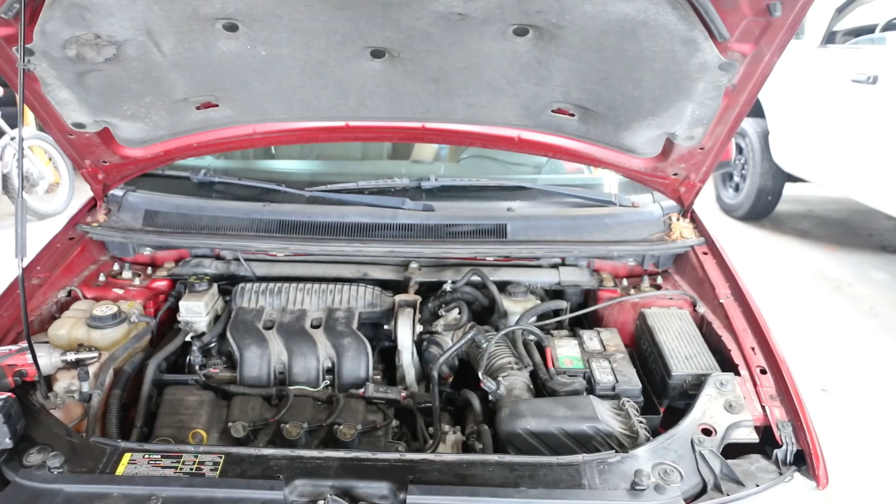Tammy, can you start it up for us? As you'll notice, when it's cold, the vehicle's been sitting for a little bit, the misfire isn't so bad. As it warms up, you'll start getting that fish bite. Sometimes it'll get worse, sometimes it'll get better. But when you put it in gear under a load, it really stands out.

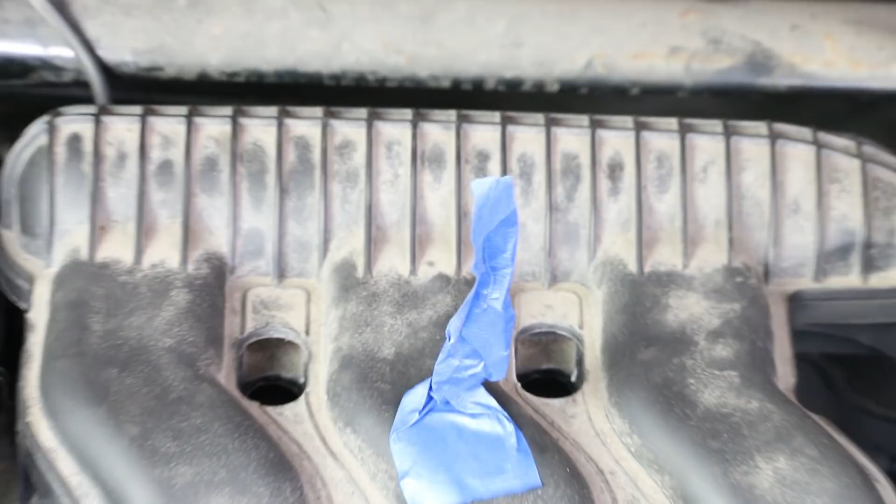Put it in drive. Step on the gas a little bit, power braking. Just a little more. A little more. Alright, that's good. A little more.

I'm hoping you guys were able to pick up on that misfire and how it got worse once we put it under the load. This scan tool has some things that we could use under the powertrain to help further our diagnostics. In addition, if you have some mode 6 data that you have access to in a generic OBD, you can go in there and look at your misfire counters as well. I have this, so I'm going to demonstrate it, but if you don't have this, the next step that I'm going to show you using an oscilloscope to determine what cylinder is what can also help guide you.

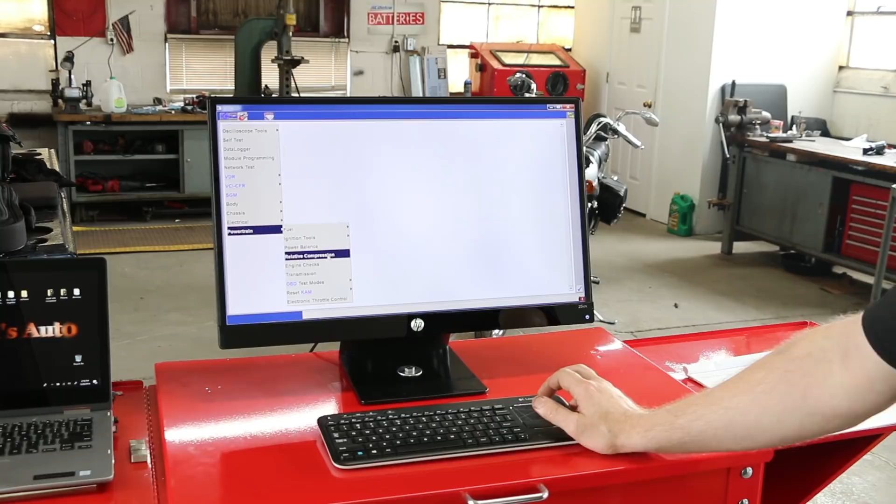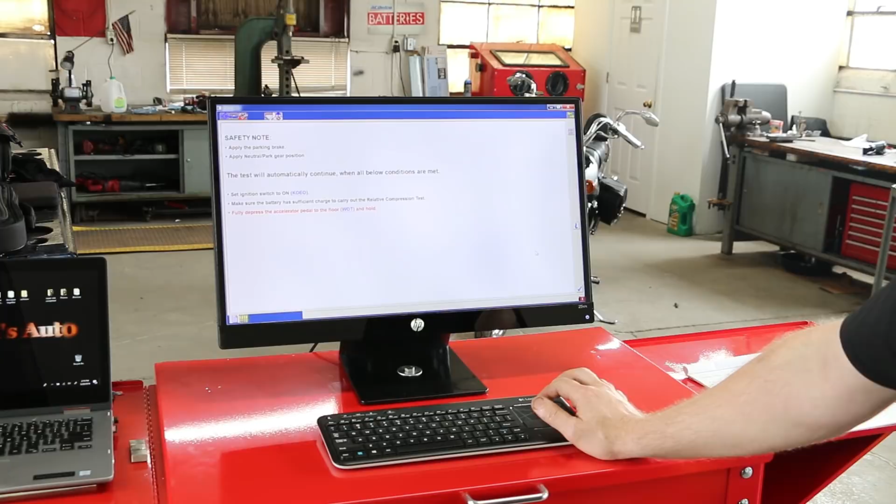We could do a power balance, we could do a relative compression check, we could determine if it's mechanical or not. So let's see, you have the key on, Tammy? Yeah. Turn the key on, please. Let's do a relative compression check. This one we had charging prior to starting up the camera. Next we're going to fully depress the accelerator pedal to the floor, wide open throttle, and hold. Push the pedal to the floor, Tammy. Now I need you to crank it. I'll tell you when to stop. Good.

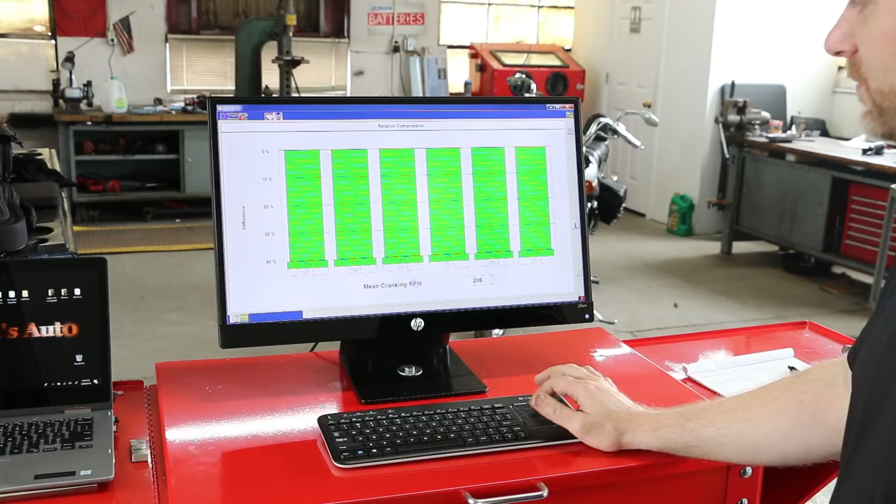You can do the same thing using current with the amp clamp with the oscilloscope, and we can demonstrate that sometime if you would like to see that. So it passed the relative compression check. So it's saying that mechanically the vehicle seems like everything is contributing, and we have 0% loss on any cylinders. Okay, so we could go in now.

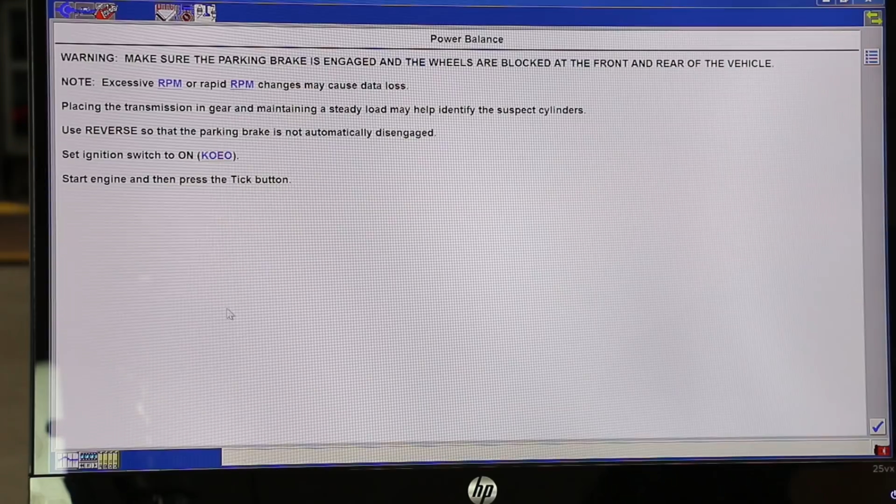And what I'd like to do next is a power balance test. Pretty much this is a misfire counter. Ford puts it out in a graph form and it'll show you what cylinder has the misfire. Placing transmission in gear and maintaining steady load may help identify a misfire. That's what we were doing before when I was trying to demonstrate it for you. Start it up.

So right there, you can see the cylinder that's dropping out is cylinder number 4. The rest of the cylinders look okay. We don't even have to place it in drive. You can do it to see if it gets a little worse, but it's almost a dead miss at this point. Want to put it in drive, Tammy?

Oh yeah, it just gets worse. So it's pretty obvious that it's doing a good job because we know that we moved everything to cylinder number 4. However, when this came in, it was showing cylinder number 1, and I didn't place it there. It came in this way, and I didn't know if I could trust the scan data. 90% of the time it could be 100% accurate, but there's always that small percentage when it could be wrong.

And for you to be misled on a job this in depth, of pulling the intake and stuff off, can really ruin your day, to say the least. Put it in park, Tammy. Shut it off.

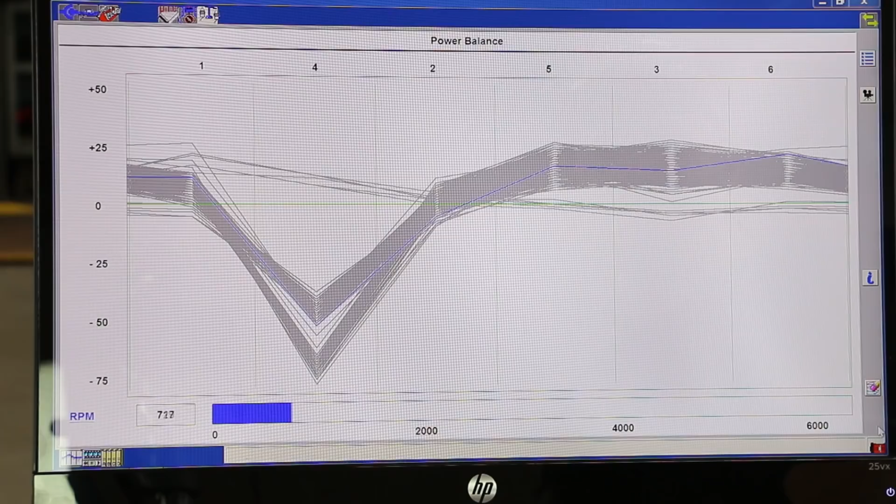Okay, so this is pretty obvious that our misfire has now moved to cylinder number 4. It's what you've seen from the process data. And remember, if you have mode 6, you can go in there, look at your misfire counts, and try to determine a route to go from there. But this one isn't so easy.

Well, cylinder 4 is nice and easy to get to, but when it came in, it was cylinder number 1 underneath the intake manifold. So I really couldn't get back there without taking the intake manifold off. So I wanted to be 100% certain that I was going in the right direction. It had the classic symptom of ignition misfire. Ran fine, put it under load, and it started getting that fish bite.

So my gut was telling me it was ignition, but I wanted to be certain that I was going after the right cylinder, and I wanted to verify that with an alternative method. So what I'd like to do next is pull out an oscilloscope. You guys have seen me use the T-Book Mini in the past, and I'm going to be using the same one again today. Some of you guys have mentioned seeing this Hantek in the background.

Maybe one day I'll demonstrate it. It's not my favorite scope. It does the trick. It has its place. But I would love to get a Pico scope. So if you're watching, Pico, someone. But the T-Book Mini has been holding me off until the day comes that I do invest in the Pico scope, which I am saving for. It's on my wish list, and hopefully one day we can make that happen.

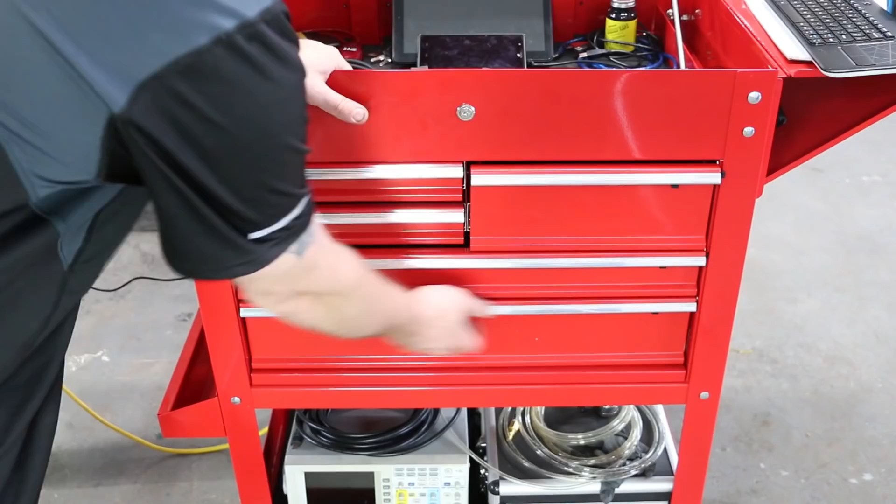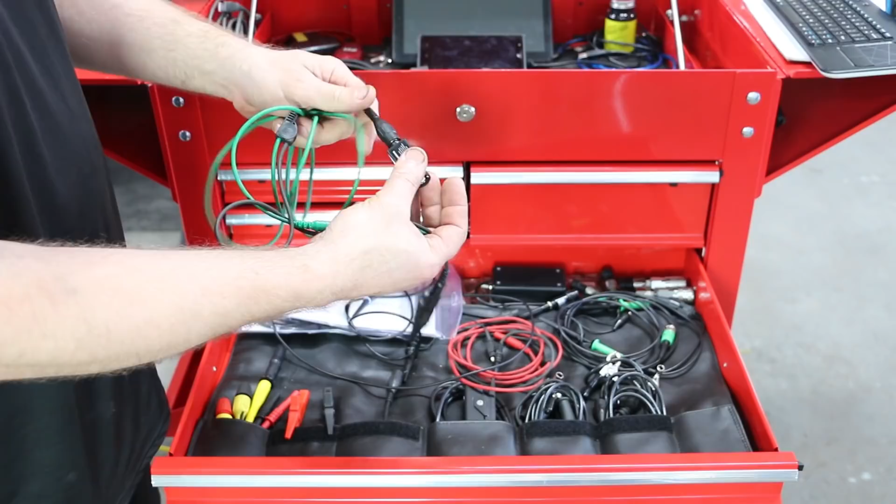So I'm going to demonstrate the tBook Mini once again. I want to demonstrate this because this is a fuse buddy, and this is my first approach. I want to get to something easy, so I'll demonstrate that as we go. We're going to need a 20-to-1 attenuator. Look at that, still set up from when I used it last. I got to clean this stuff up. But this is going to be for the primary voltage. And we'll need a low amp clamp.

In order to use the oscilloscope, we got to know where to hook it up, right? So I actually have some schematics pulled up. Let me drag them over here for you. And where I got the schematics for today's video was from BBB Industries. This is a very helpful resource. You can look up some TSBs, wiring diagrams, and I was turned on to this website through Ivan from Pine Hollow Auto Diagnostics. He mentioned it in a few of his videos, and that's where I learned about this.

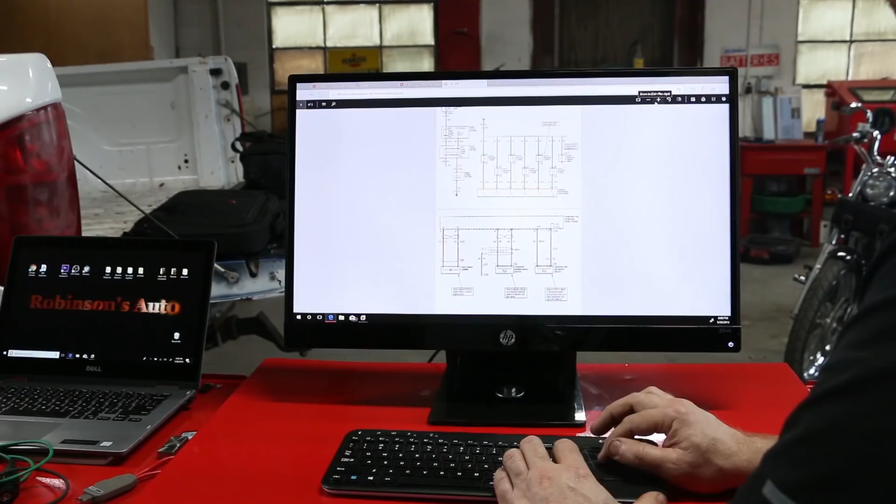So as you can see, 2005 Ford Freestyle. Went to engine, went to subsystems, and I went to ignition. It gave me one schematic, and I actually saved this schematic to the desktop. We'll get a closer view. We'll zoom in a little bit. I'm hoping this is showing up on the video okay. But this is the first initial schematic that we brought up.

And if you follow everything down, you'll see we have the ignition coils, 1, 2, 3, 4, 5, and 6. Everything's showing here, in addition to an ignition transformer capacitor. It says it's there to minimize radio interference caused by ignition coils. Okay, so that might add a little bit of something or another to the circuit, not certain.

So what I thought was, oh wow, everything looks like it's just on the ignition coils. We should get a nice clean signal from fuse F1.41, 15 amp, located in the battery junction box, BJB. Okay, we know that because of 361 RD. If you look down here, 361 RD, pretty much sit that on top if there was enough room, and that would be your flow.

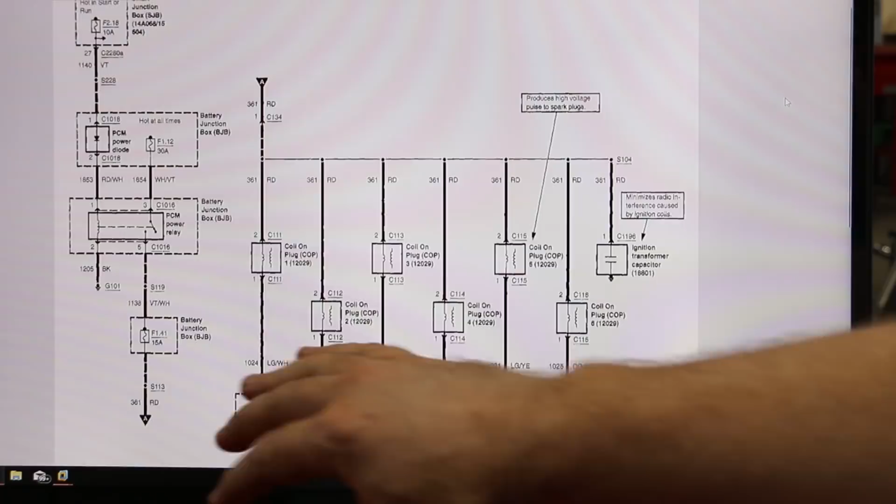But yeah, you would think that fuse 41 from the schematic is the only thing feeding this circuit, or this is the only thing on that circuit. But you'll see otherwise once we go to the fuse box, and I'll show you what I found. The junction box nearest the battery. Then I located fuse 41, 15 amp, which is right here. And I put it into my fuse buddy. Okay, now we've made a nice little circuit, pretty much doing the same thing, but we put this little loop here. Okay.

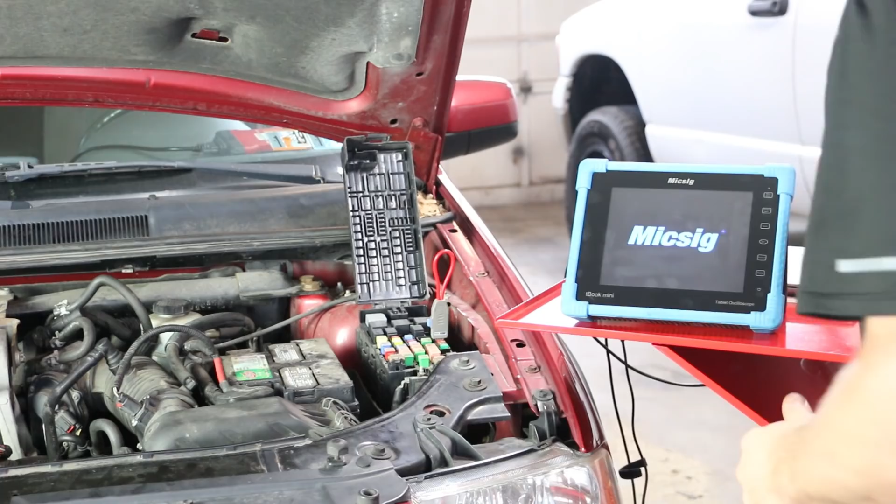So now that we had a place to put our amp clamp, we moved it a little closer and we started preparing ourselves. Now this oscilloscope isn't going to have any presets on it, and it's kind of one of the things I like about it because it forces you to learn how to use it. And once you put them in there, you can save your own presets. But it is what it is. I make the best of it because it's what I got.

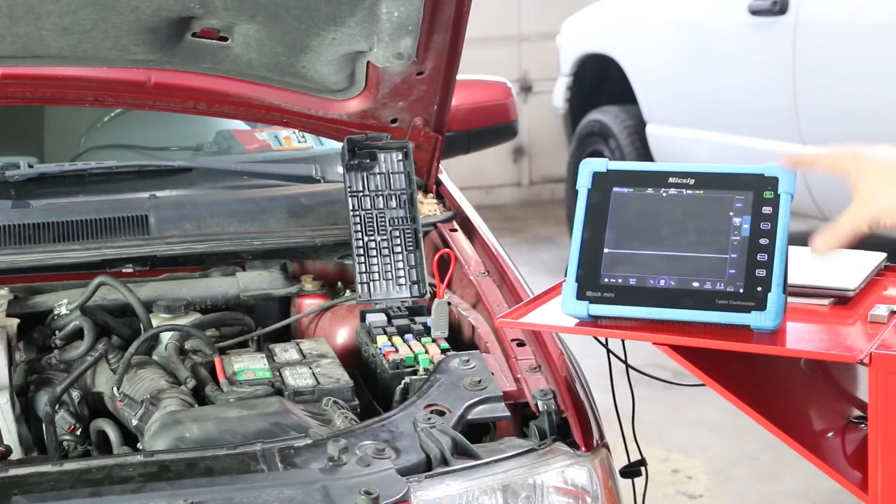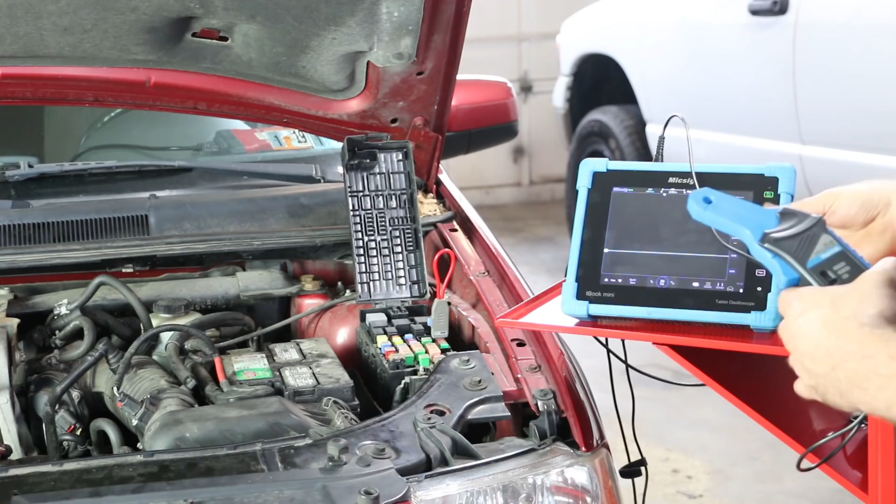And I'll bring it in here closer and show you what we got going on. Because this is just initially the way I had it set up. So I'm just going to leave the scale set up the way I got them. Later we're going to add another channel, and that's going to come off of number 1. And that will be what we use for a reference to trigger off of the primary voltage. We could pick any coil. So to leave it set up the way I got it, I'm going to put this on channel number 2, as you see out the top, which would be that blue trace.

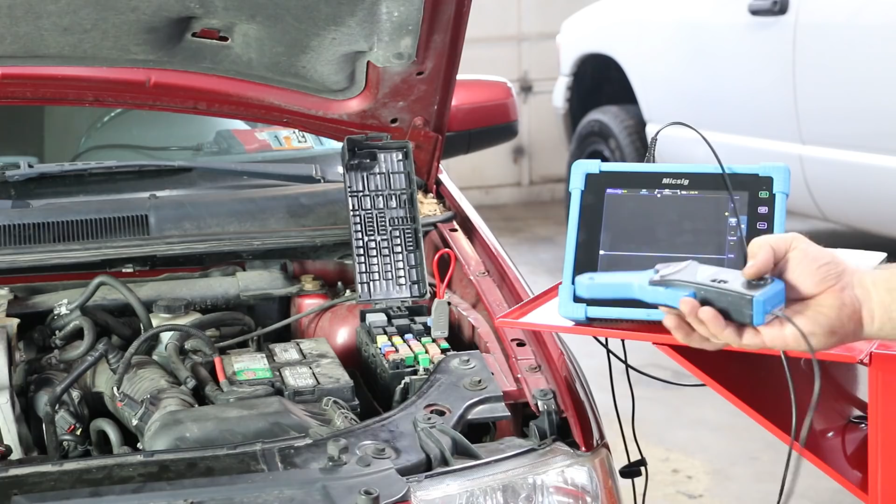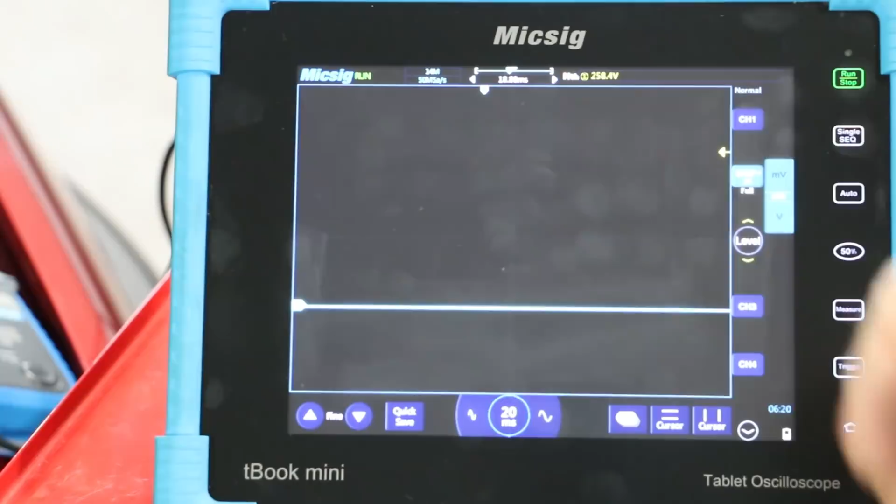Okay. Then we'll turn our amp clamp on. And we got this set to the 10 millivolts / 10 milliamps. And then we're going to zero it. Push that button like so. We're going to install our amp clamp. Channel number 2, we have set up DC current times 10. I have a low pass filter on there. We'll leave that on full for now. We'll put the filter on later if we need it. 20 milliseconds, set at 2 amps per division. So each block is going to equal 2 amps. Okay, start it up.

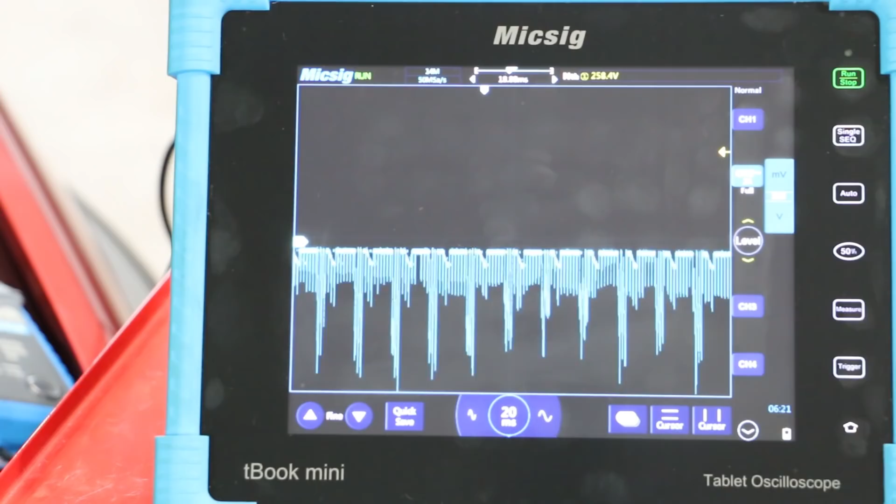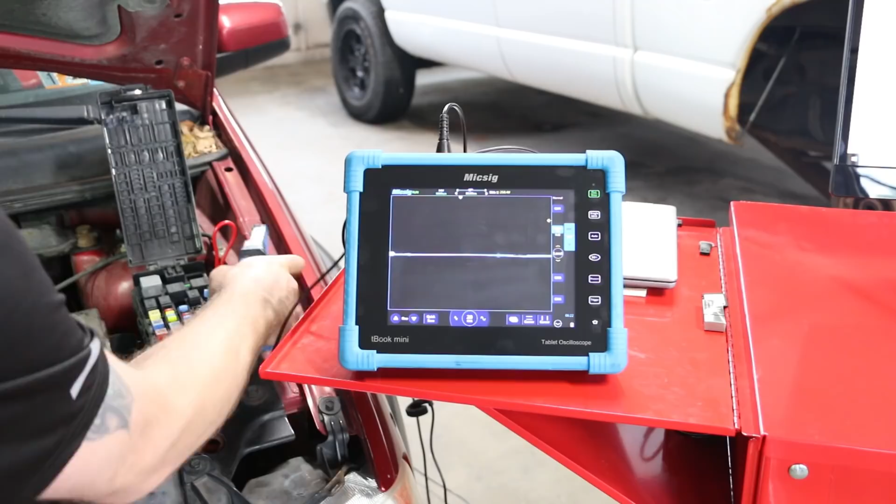Well, the first thing I see right off the bat is that our current signals are upside down. So we can invert them in here, or we can simply flip our amp clamp around. Okay, and once I seen this, I'm like, wow, that's pretty noisy. There's a lot going on in that circuit. We could zoom in a little bit. I don't have a trigger set. It's going to be hard to really set a trigger on channel 2 because we have so many similar... we can make it a little better. Not very much.

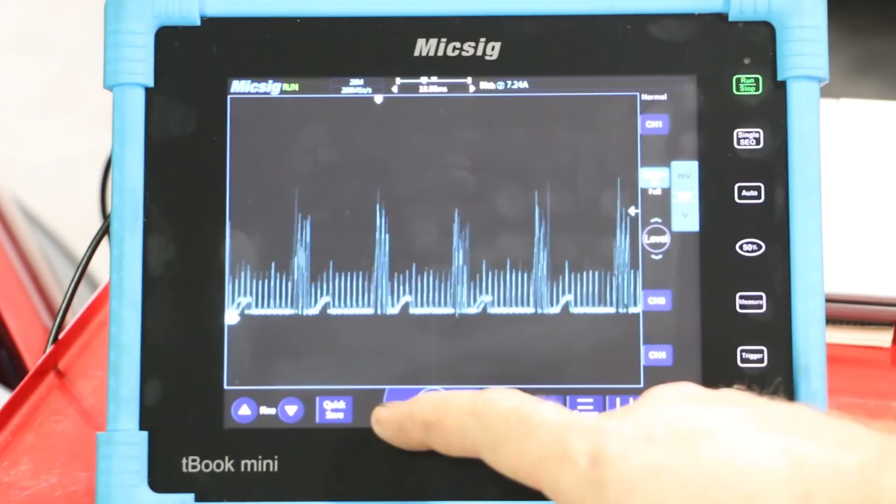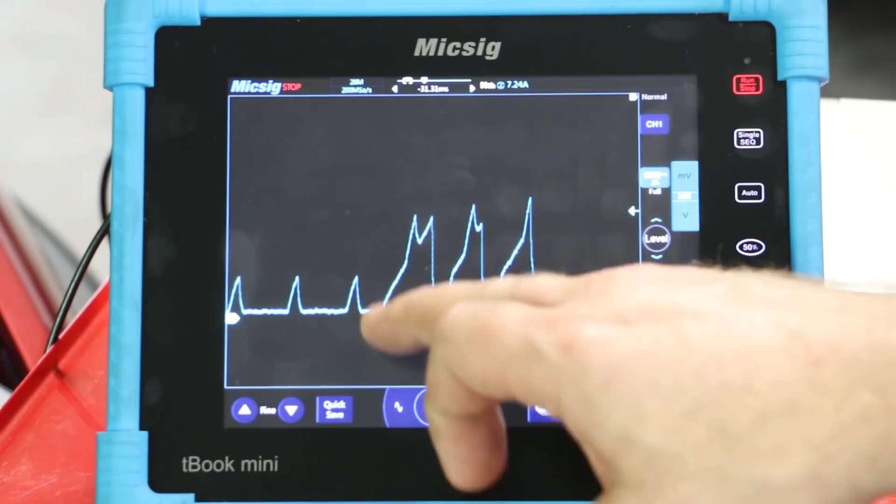But a very noisy signal here, so can you stop it for a second, Tammy? I want to show you, we can zoom in, but Ford uses a multi-strike ignition on this vehicle. But you can see all these little amp ramps where they fall right on our peaks. So we want to try to get that a little cleaner. That signal is just a little too dirty.

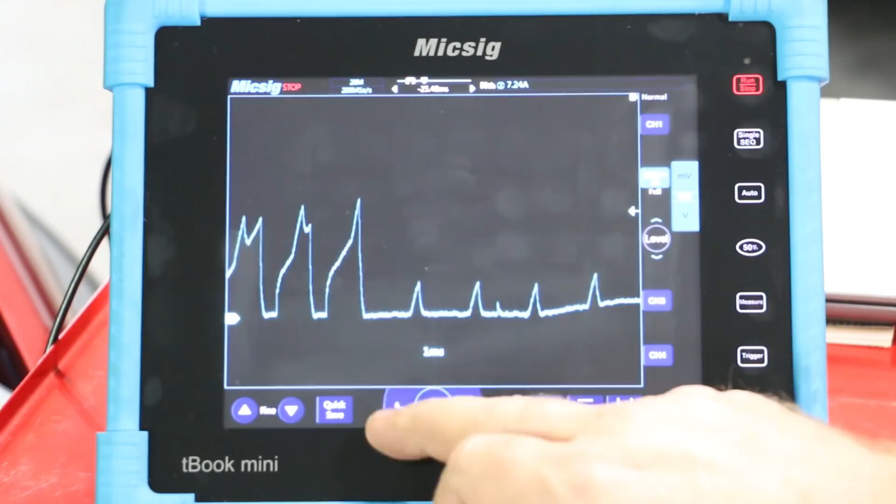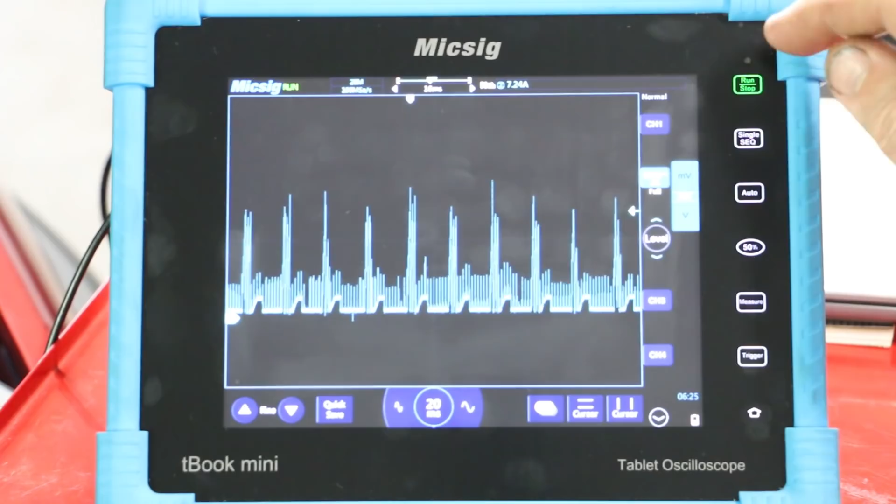This vehicle really shows the misfire when you put it in gear, and I just want to see if we see something really stand out when we do that. Hold your foot on the brake and put it in drive. See, I think because the signal's so noisy, we're not really picking up the fine detail too good. So the signal's just too dirty. So it was apparent that there's more on this circuit than what initially meets the eye.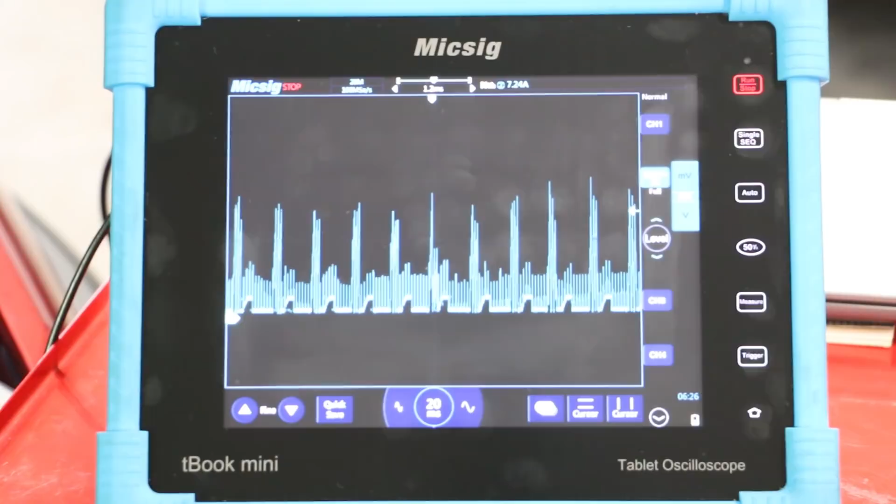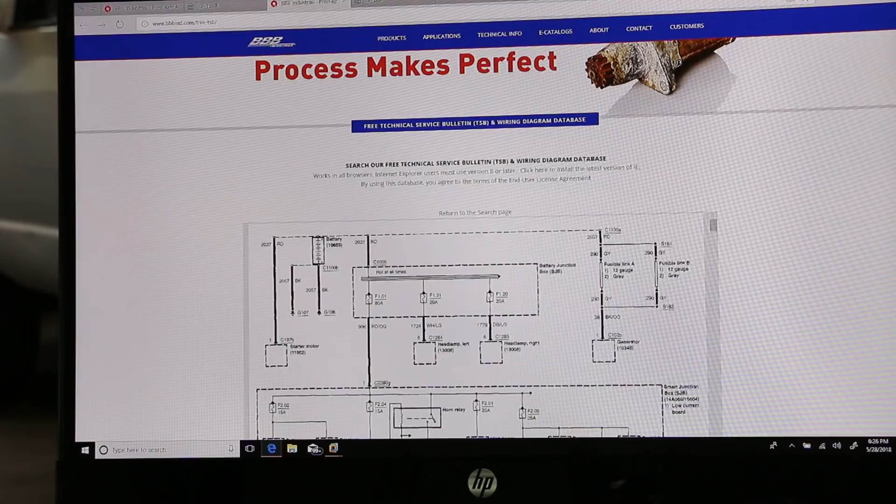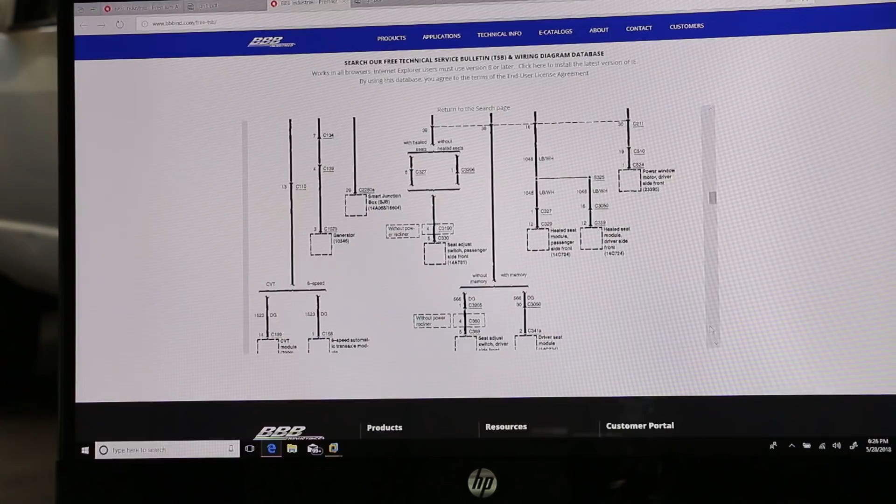So let's go back over and I'll show you the second wiring diagram that we found. But this time I went to electrical distribution, then subsystems, power distribution, and it says there's one here. And we came down and I scrolled through all these. Long story short, you get down here to the bottom. But you come up top and you see fuse F1.41, 15 amp. That's the same one that we have the fuse buddy in.

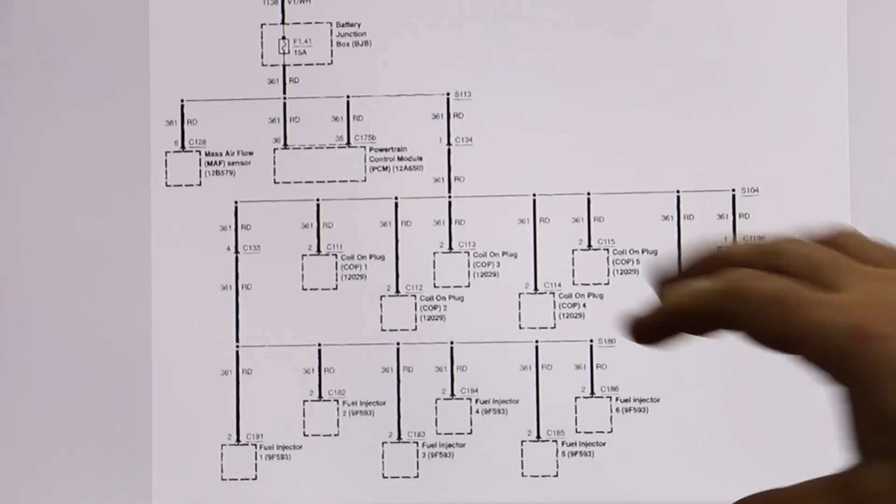But now you look down and you can see that it's feeding the mass airflow sensor. It's also feeding the powertrain control module, the PCM. All 6 coils, the same ignition capacitor, and also all 6 fuel injectors. And there may even be more. But I do see that there's a branch here for the coils and the injectors. And most likely that's all that's on that line. But there may be more, we just don't know. But there's only one way to tell.

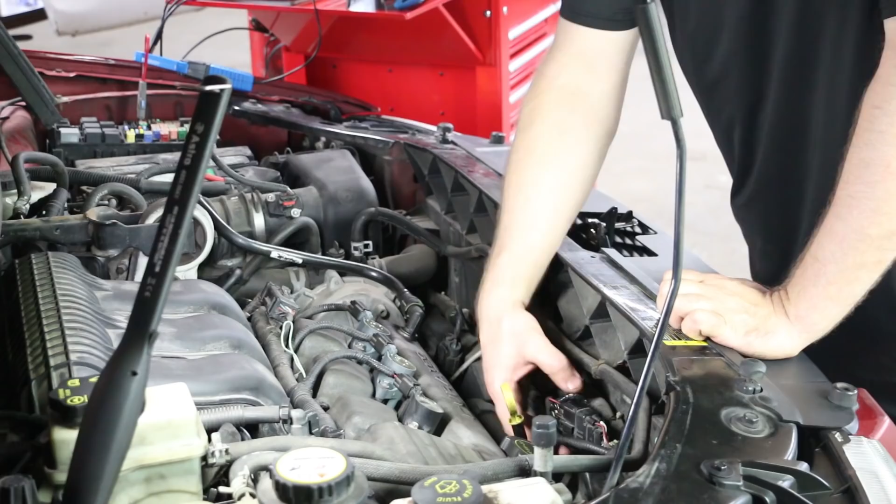So I've seen that we have C31, that's a connector, or 134, I'm sorry. C134. C as in Charlie, 134. So I looked up a connector view and I located where connector 134 is located. What my hopes were there is to get rid of everything else up here and see if we get a nice clean signal, or a cleaner signal, something we could work with down near C134, since it's easy to get to. We determined that C134 is located up near the radiator support, right on the front side of the engine.

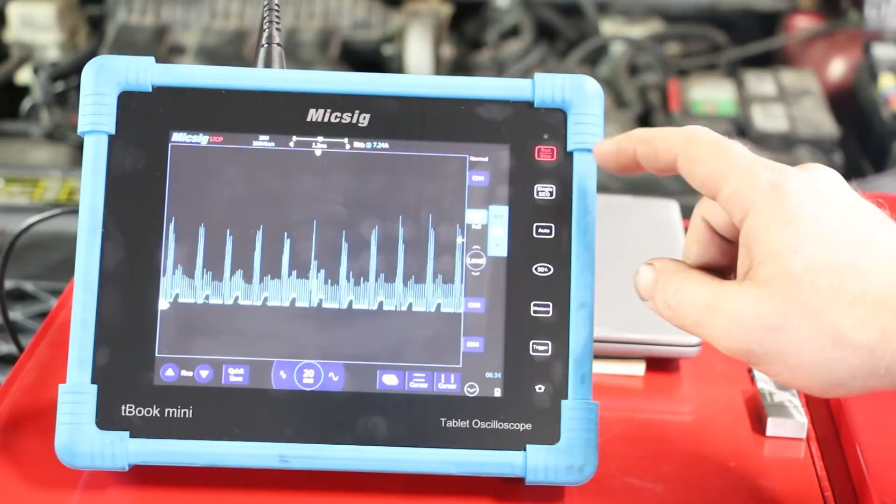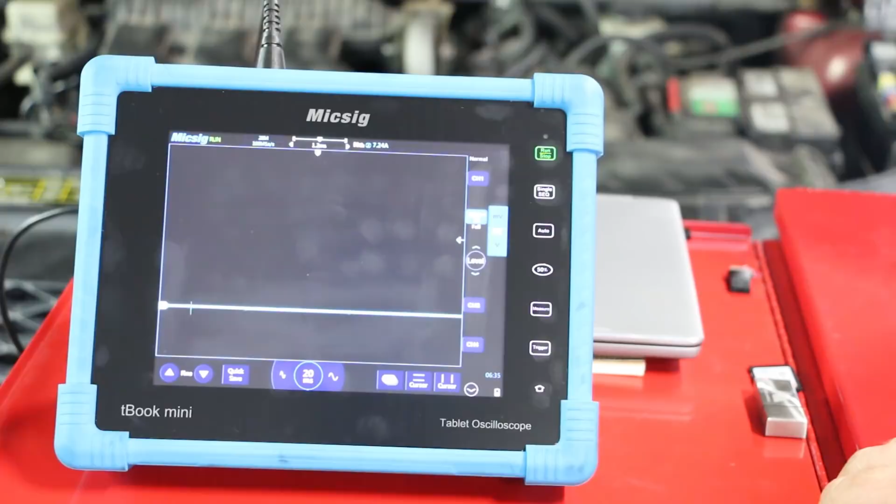Pretty much clips into the shroud for the fan, and it's this big black bolt connector here. And we found a red conductor, so we're going to wrap our clamp around there. We can leave the fuse buddy in place. So we're going to start this back up. Okay, Tammy, I'm going to leave the time base at 20 milliseconds, 2 amps per division. Nothing's changed here. Can you start it for us, please? Upside down again.

Okay, so right away I see that there's a much cleaner signal. Oh yeah, I can zoom in a little bit. You know, we don't have a good trigger point here, so it's looking really sloppy. But we have a much more defined pattern here.

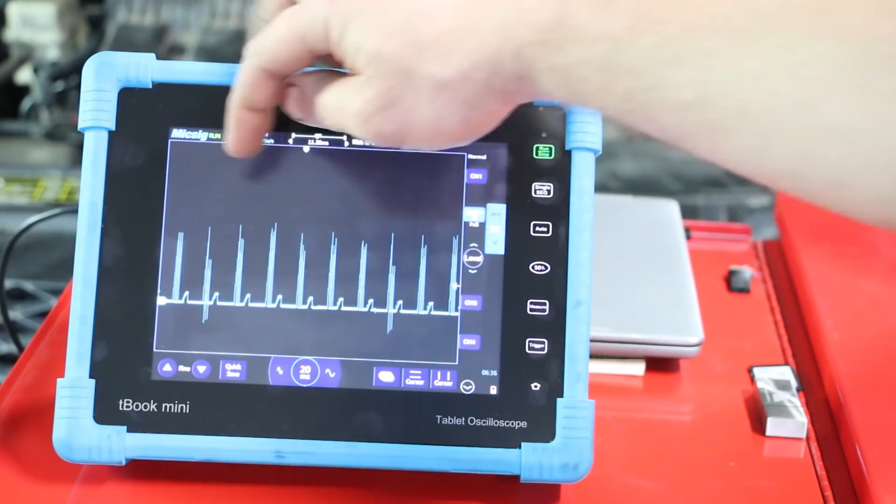And at 20 milliseconds, I see these 2 events that are really standing out. We should have 5 cylinders between them. 1, 2, 3, 4, 5. Okay, so those are the same cylinders, both of those events. That's exactly what the Ford IDS is picking up on. But how do we know what cylinder that is? So we know that we definitely have something going on, but now we got to figure out what cylinder that is.

Take a closer look at that. Tammy, turn it off for a second, please. Just gonna play for a little bit. Yeah. What's going on there, guys?

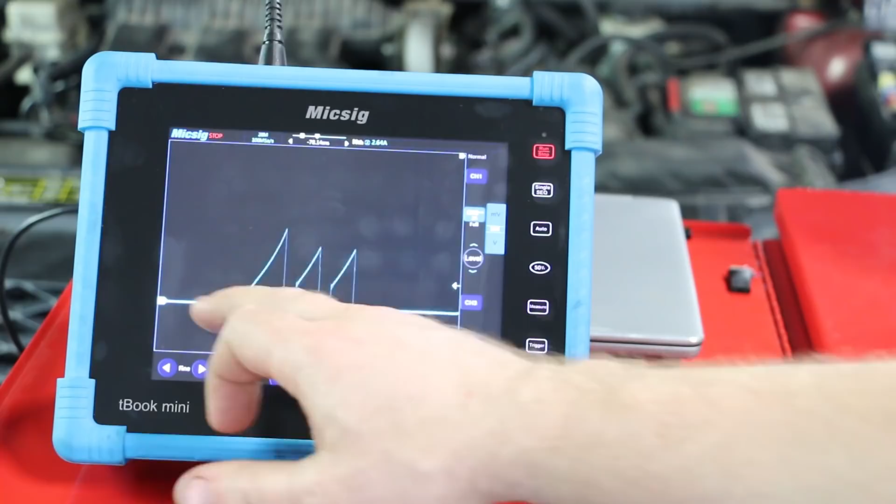Now that's the one that's acting up. Let's look at a known good right next to it, right? You see nice oscillation. Okay. Nice defined shutoffs. That zoomed pretty far in. And oh, I think it was down here, right? Yeah, so let's zoom in on this one a little bit more.

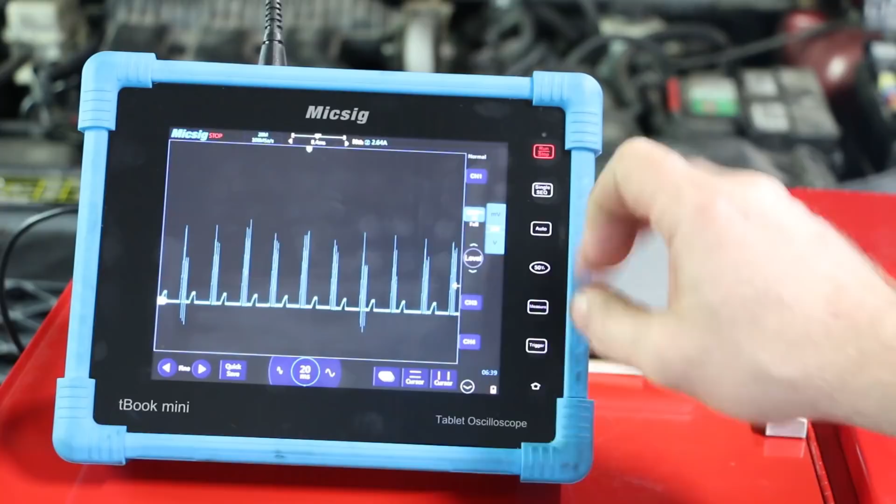You can see I have a nice defined shutoff, but then it's very unstable on that base, right? Very unstable. What is that? And why are we seeing that on the primary current? Let's just put this back to 20 milliseconds. Okay. Now we're back on the same waveform as we were before. So I didn't change nothing. 20 milliseconds, 2 amps per division.

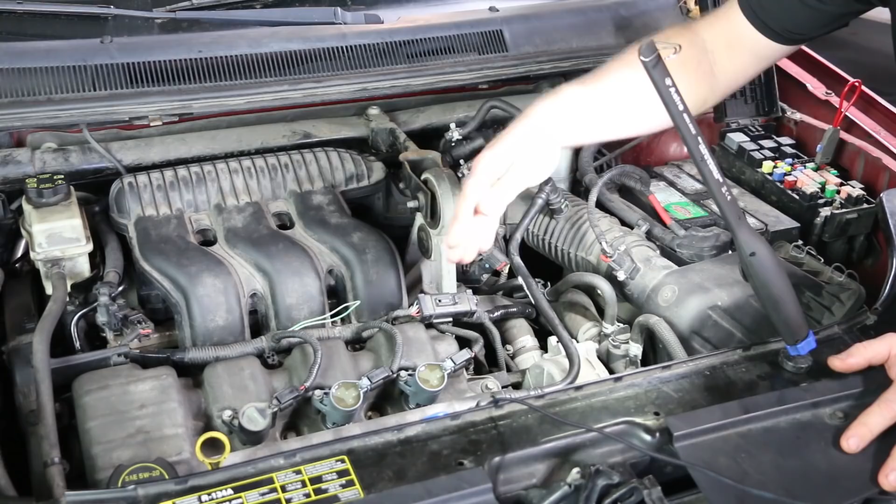However, now we're going to add one more channel. We know cylinder number 4 is where our problem lies. I could back probe cylinder number 4. We could also look at the primary voltage for cylinder number 4. But for now, I'm going to demonstrate how I found the cylinder when it was in the back and I couldn't get to it to back probe. There's a conductor that all these have in common, and that's the power feeds, because that's where we're reading our current ramp from.

So now we want to read the voltage. If I back probe it on the red side, I'm not sure we're going to really see much activity on that side. We're going to just see the battery voltage staying constant. You'll probably see some activity, but where you'll really see it is on the ground side. So on the control side of the circuit, you'll see it turn on and off. Now it doesn't matter if you're taking an amp reading, you can put it on either one of those wires. But to do this next test, we want to back probe the control side, what we would call the ground.

So, like I said, they'll all have the same color red wire, but there'll be a different color wire. On this one, it looks like it's an orange and yellow, and this is coil number 6. Known good. Every cylinder except for number 4 has brand new plugs and coils. All right, so with the back probe, you want to keep the probe tight to the wire, and then you have your weather packing. You want to try to get in between that packing and go in just like that. You don't want to pierce the wire, and you don't want to tear up the packing either. And you'll feel it when it hits. And then you just stop there. You don't have to go shoving it any further.

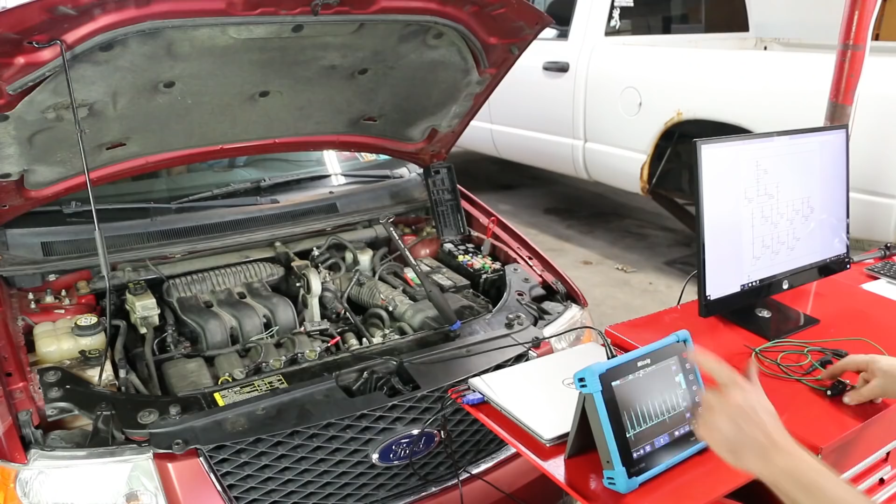Remember, channel number 2 we had set up previously, and I'll go over those settings with you as well. But we'll be using a 20-to-1 attenuator. The reason for this is because there's a potential of a higher voltage than this may be capable of handling on the primary side of the circuit. So it could exceed potentially 400 volts, and that wouldn't be good. Here, green lead. Put it here. I know I'm not using the corresponding colors. I probably should be for a demonstration, but they all work pretty much the same.

Now I'm going to find a good ground. Put it right over on the battery, and that should be good. Everything's still the same as we left it. I'm just going to move that up a little bit, because now we're going to introduce channel number 1. So we're going to go to channel number 1. We are on. I have that set at 40 volts per division. I do have a low pass filter turned on. We can turn it off for a little bit. See how it looks on full. DC, volts times 20.

Okay, so let me do a quick save of this. Okay, so that's our before with just the current reading. Now we're gonna, you know what? I want to take a picture as well. Let's turn this on. Okay, now we have a fresh slate. And Tammy, can you start the engine, please?

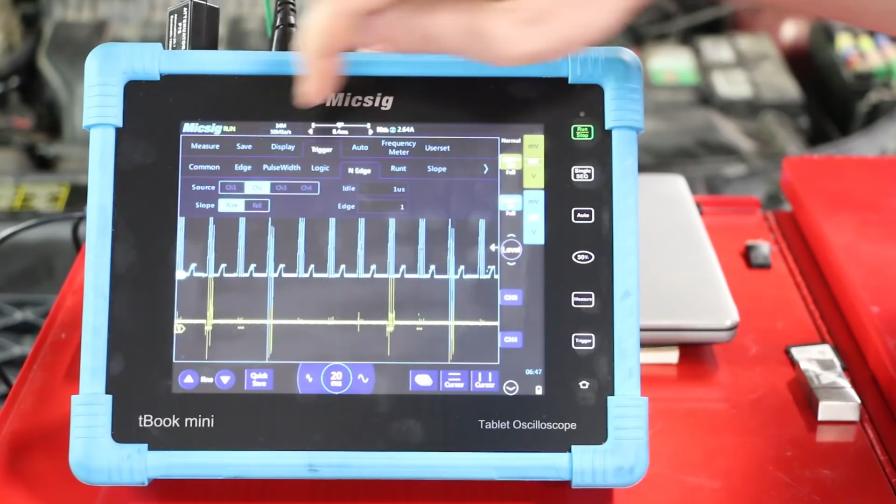Okay, see how everything's just bouncing around? That's because we don't have a good trigger. So now that this only has one event, that's going to work really good as a trigger. So what I want to do is bring up my triggers here, and then my source, channel number 1. Okay?

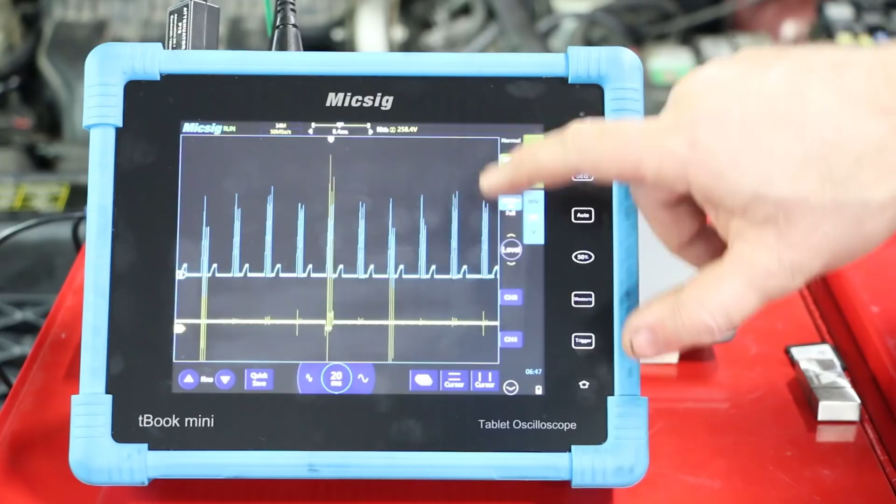Then on this Micsig, you see where it says level? That's how you control that trigger. So you push that, and it brings up this little slider with that yellow arrow. And then we simply move that. See, if I get it out of the screen, everything just starts rolling again. If I grab it and I bring it down,

this is the one we're trying to trigger. This one here has a lot of noise in it because of that misfire. So we know this one here is cylinder number 6. So if I add that filter like I had in there before, you see it took out that other noise, and all we're seeing is cylinder number 6.

And I can move this up a little bit just to give you a clearer picture. Might move this trigger down a little bit, and as you can see, it's nice and stable now. We could stop it. We'll pause it for a moment, do a little quick save,

and I also would like to take a selfie with it. No, just take a picture for future reference. I'm not sure if that one, yeah, there you go.

Alright, Tammy, turn it on for a moment, please. Okay guys, so what do you see? We added that second channel, correct? Well, channel number 1 we put online. Channel number 2 is our current of all the cylinders, the corresponding amp reading of the primary voltage. The only coil we have back probed is coil number 6. Therefore, we know that that is number 6. This is cylinder number 6 event.

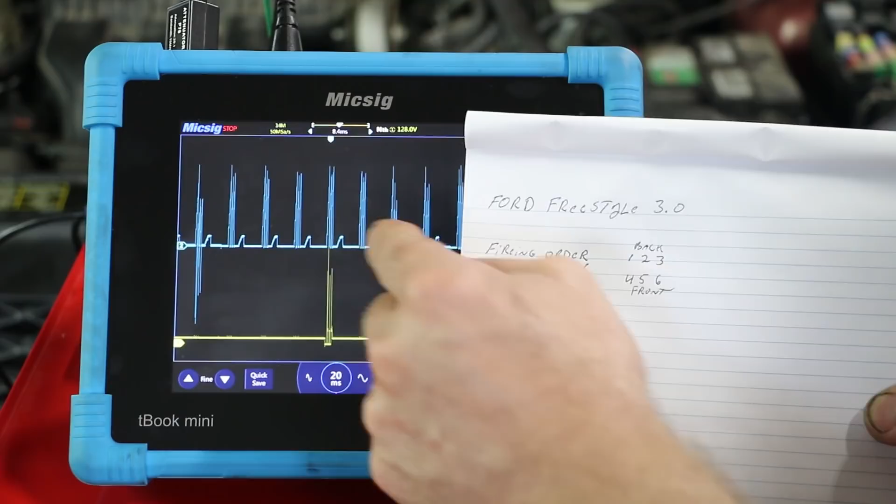So after 6, the cycle starts again. So it goes 6, next one will be number 1, and then number 4. And what do we see, guys? Right there's our confirmation that there is indeed an issue in cylinder number 4. But what is the issue?

I'm going to zoom in on this capture we have here, because I want to show you how Ford uses this multi-strike setup. This is at idle. If I bring it above idle, it will eventually go into a single strike. But you can see the coil is turning on. This is at 40 volts per division.

So you see that little yellow number 1? That's your 0 volt line. A little ways up from that is probably your running voltage, and we could take a measurement of this. And that's telling me that's probably right around 13 volts. And then you see when it pulls down to ground, that coil is turning on, and that is your dwell time, okay? That is your dwell.

Coil's charging. If I zoom in a little bit further, you will see some oscillation taking place, okay? As that thing is charging, you're seeing that oscillation in that ramp. That's a good sign.

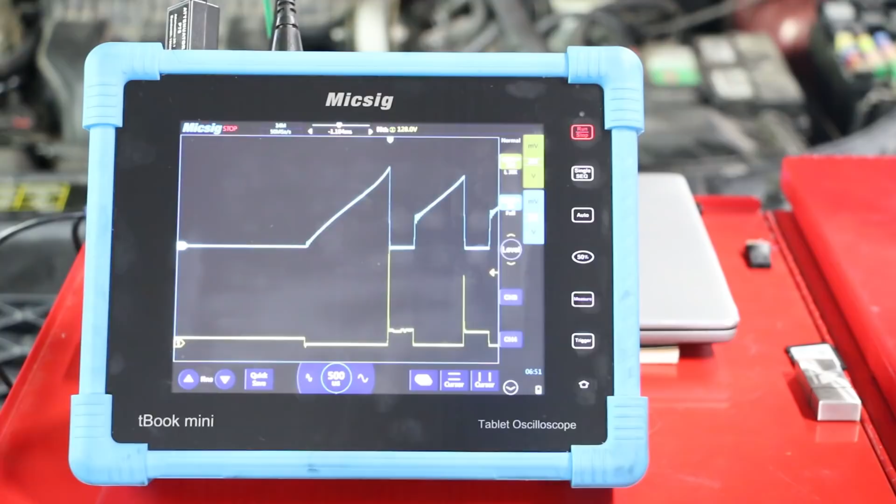I learned a lot of this stuff by watching our friend Scanner Danner, and I take notes. And I tell you guys, I learn something new every day, and I watch and I learn, and that's why I try to share as well.

So it's charging something on that secondary side. It's not saying that it's perfect, but there's something taking place over there. If it's nice and smooth, then it's not charging anything. I learn something new every time I look at these waveforms, and that's why I want to share this one with you, because I want to know what your perspective is of these waveforms. So as we got here, we'll call this a known good.

Number 6 has a brand new coil, brand new plug. Everything is gapped to spec. Okay, so the coil's turning on. There's your dwell time. You see the spike when the coil turns off. That's because of the magnetic field collapsing, just like you'll see in the fuel injector, current ramp, and voltage as well. Drops off nice and sharp.

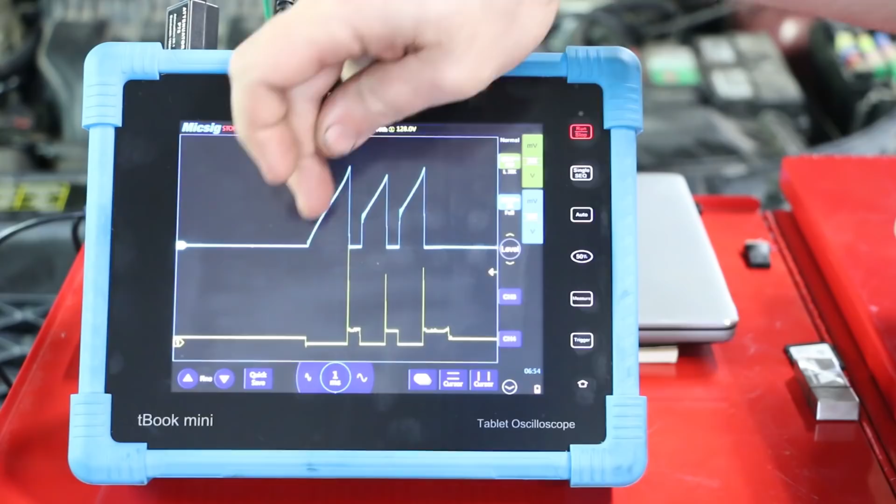The multi-strike system takes over again, so you're not seeing a good burn time because it's being interrupted, and then it starts charging again. Burn time starts, you can see right here, but it's interrupted. So when you want to measure your burn time, you would do it down here, I would assume, because this is your nice clean burn time. If you want to measure your good current ramp, I would measure it from this side. Same thing with your dwell. Measure your dwell from here, measure your burn time from here. And we can take these measurements.

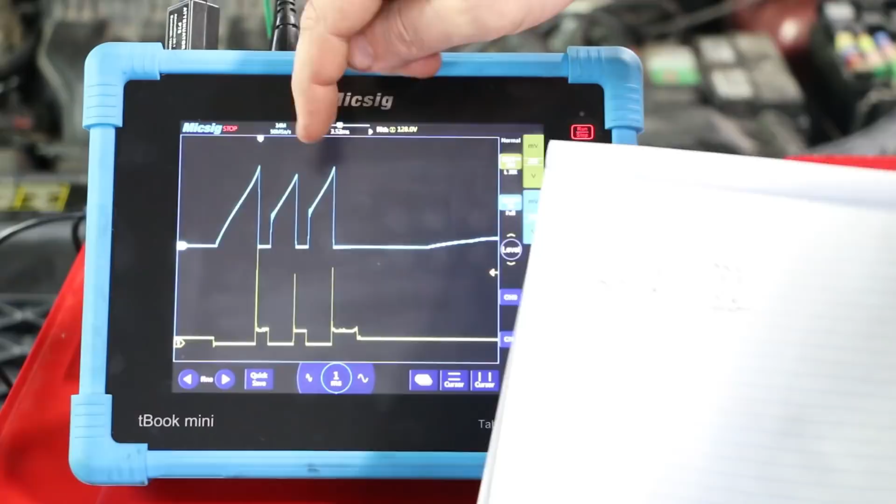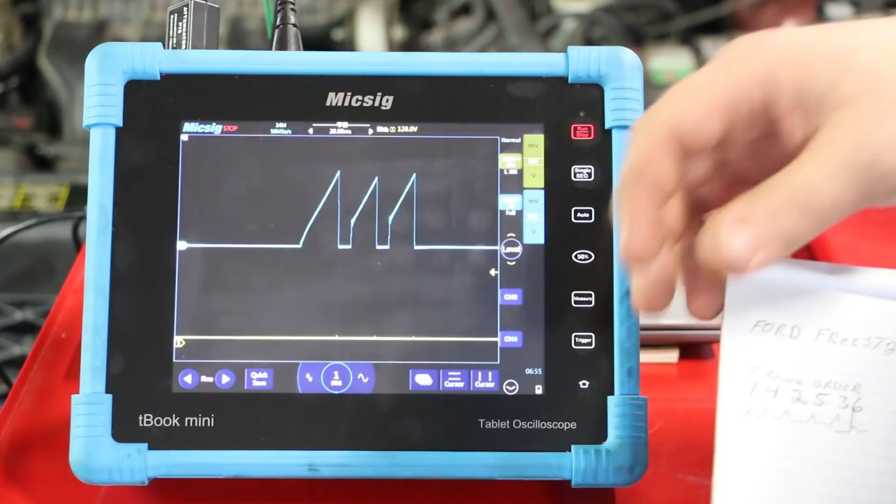So if we go down a little bit, we know, looking at our notes, if that's number 6, next in line will be number 1. Number 1 looks very similar to number 6. We're not seeing the voltage side of the primary because we don't have that one back probe. After number 1 comes number 4. And this is where it gets interesting.

Bam. What is going on there? I would like to know. I would like to take a picture of that too. Okay. That is the misfire on cylinder number 4. Now I'm going to take you back and we're going to look at number 1, and we're going to take a picture of that. That way I could put these side by side for you.

What the heck, guys? I'm going to do a quick save because I'm not sure if that does just that portion. I think it does. I'm not sure, but we'll find out. I'm going to do a quick save of this too. Hopefully I can put them over top of each other. And this is a nice one here. Quick save.

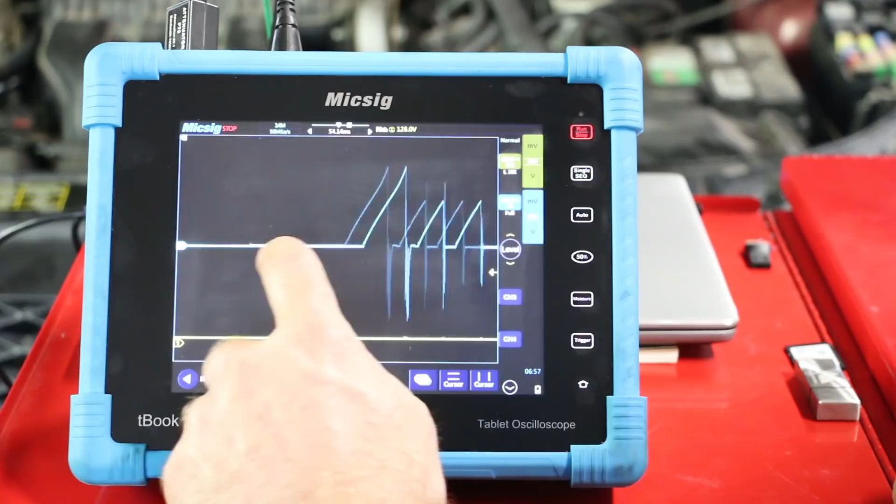Can you tell me what kind of misfire that is? Is it a coil? Is it a spark plug? Is it voltage? Is it ground? What is it that's causing that event? Zoom in a little bit more. That's something else, right? I honestly don't know what's going on inside that coil, but maybe one of you guys know more about this than I do.

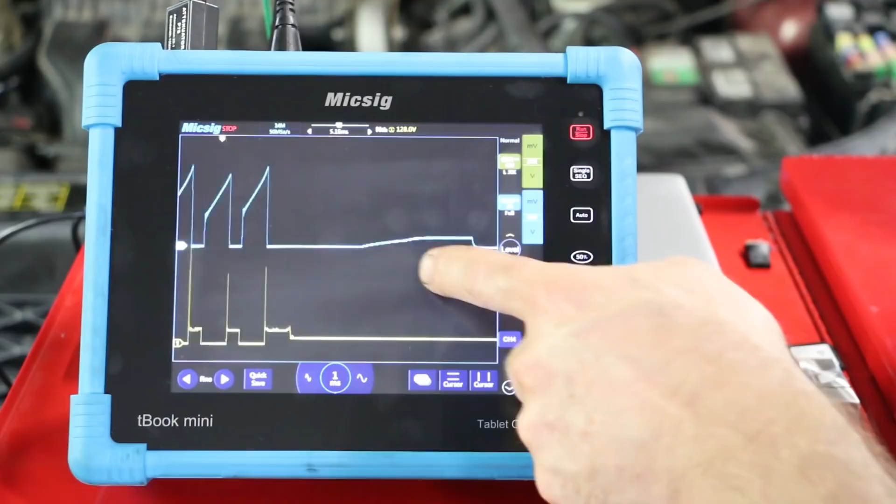One thing I'm curious to see, now that we have this out of the way, since we could get to it on this one, and if we really had to, we could get to the primary voltage of number 1 as well. We just have to locate it in a different location. However, I wonder what the primary voltage looks like compared to the primary voltage on number 6. Would you guys like to see that real quick?

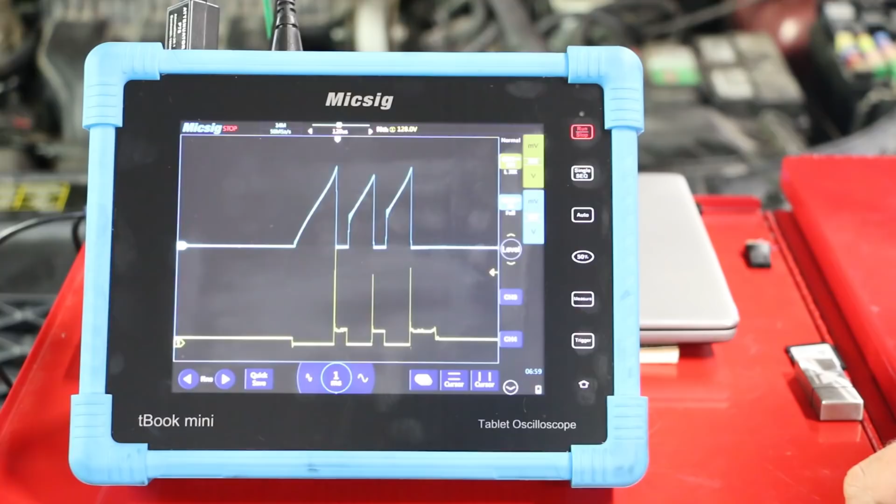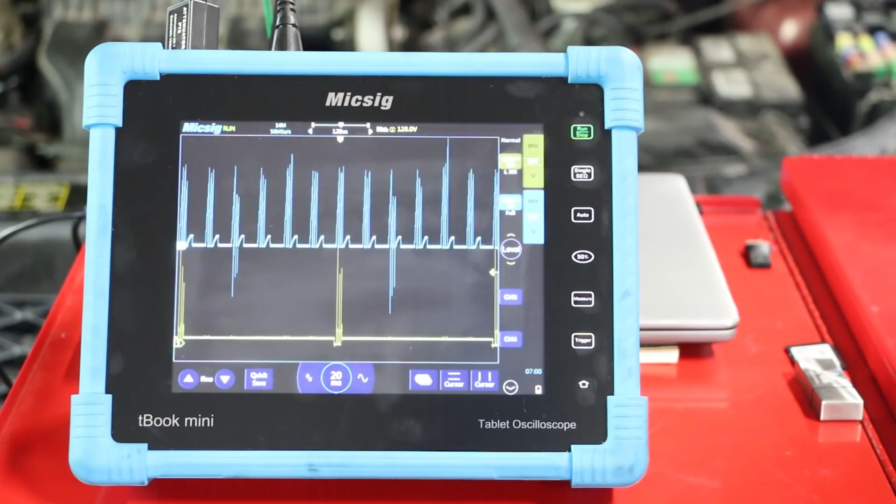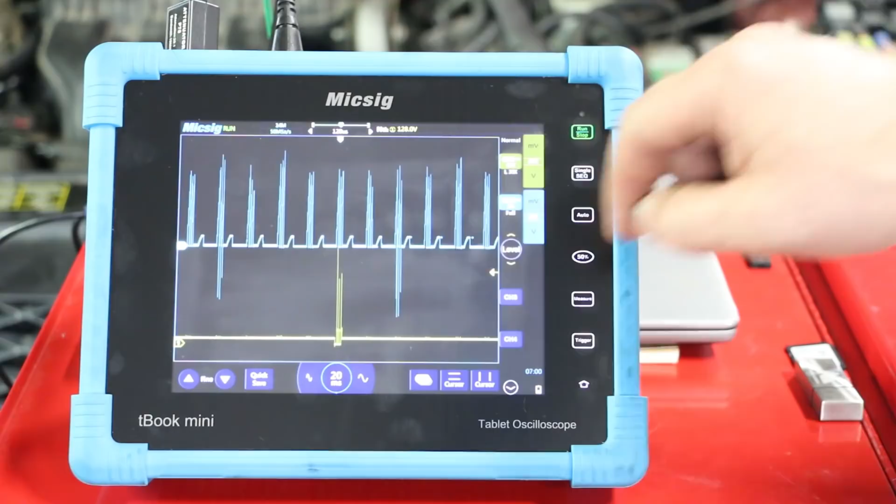What I'm going to do now is simply move the back probe from number 6. We're going to back probe number 4 coil. Put this back to 20 milliseconds again, just to make sure everything is still good. Tammy, can you start it up for us, please? Okay. So everything is just the way we left it. All right. The only difference is that the signal is now going to be in relation to the same coil with the misfire. All right, turn it off, Tam.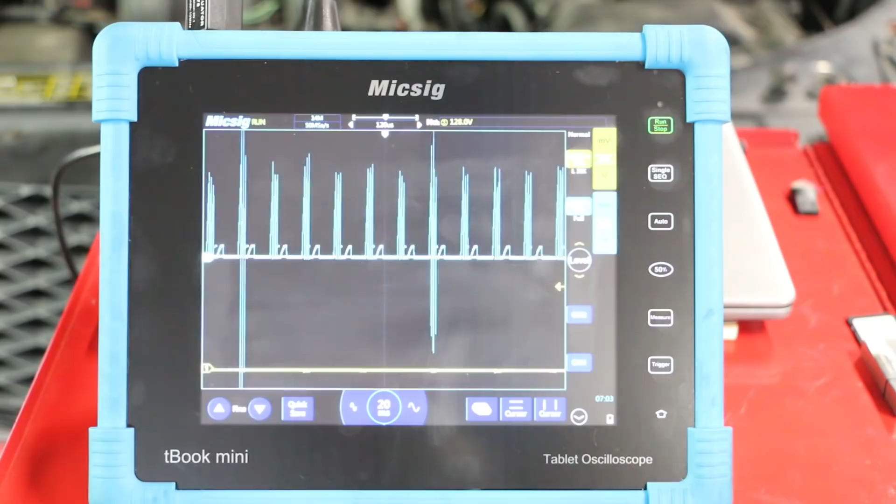Clean slate. This is with channel number 1 now on coil number 4. Let's see what we got. All right, Tammy, start your engine. Must have a bad connection. That better? It's got a pretty good misfire at the moment. Actually off the scale. The misfire when I'm back probing ignition coil number 4 is really interfering with the microphone, as you can hear.

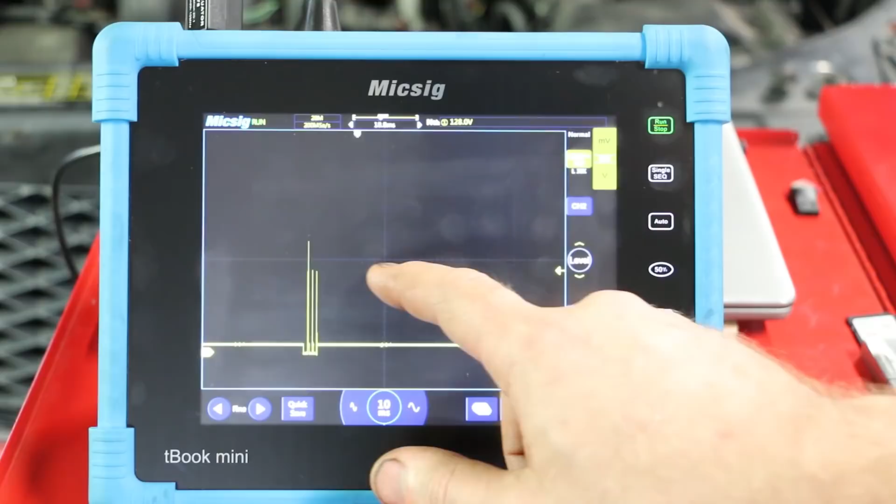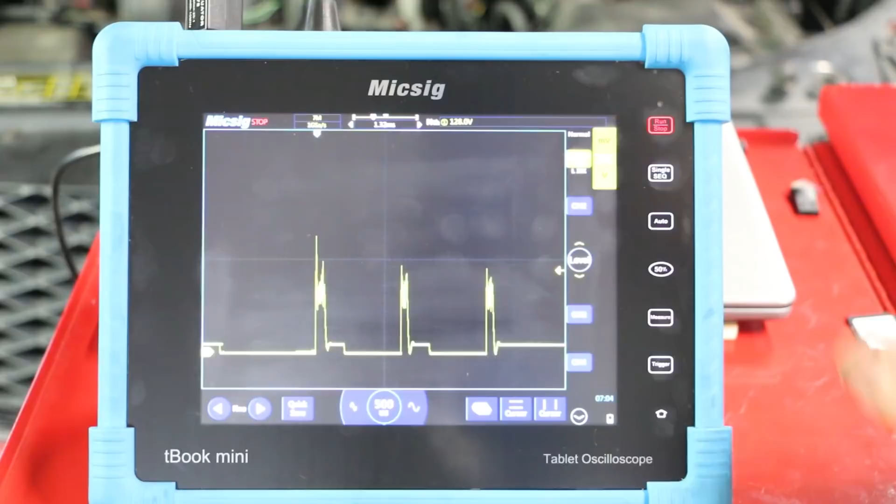So we chose to do a quick voiceover. I'm going to turn off channel number 2. That way we could just get a closer look at the primary voltage and see if we could get some more detail, because this will tell us a much greater story. So I'm going to zoom in a little bit, setting my trigger. It's showing us a lot more detail, and we're going to take a closer look at that and compare it to the other good cylinder. I want to take a picture of this at 1 millisecond. Okay. We're going to start this, and I want to get the same capture on number 6.

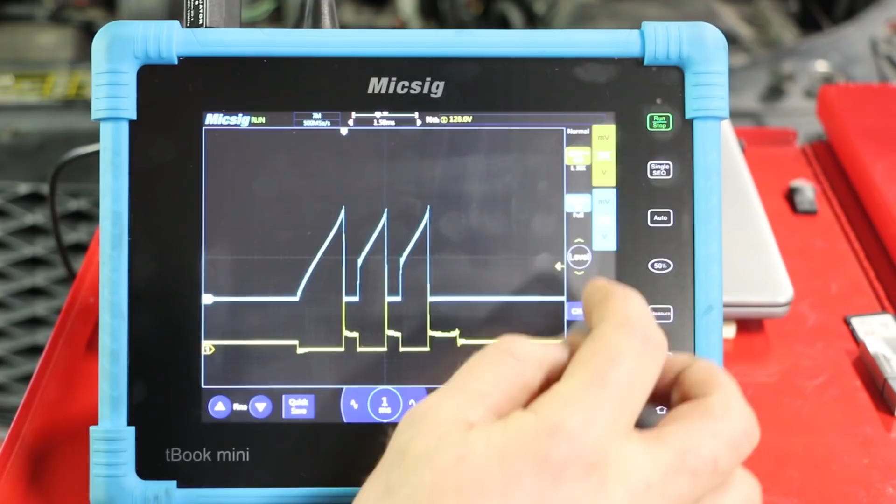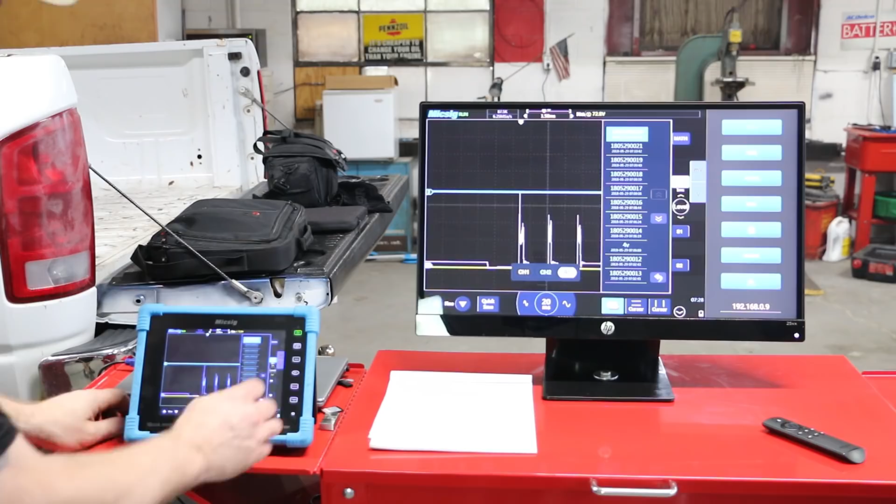Okay. Here's number 6. Now we're good. 1 millisecond. Throw channel 2 back in the equation. So here's my question to you guys. Click on the reference. Reference 1, I'm going to go to the very last capture. Okay, that's our known bad. Reference number 2, I'm going to put a known good.

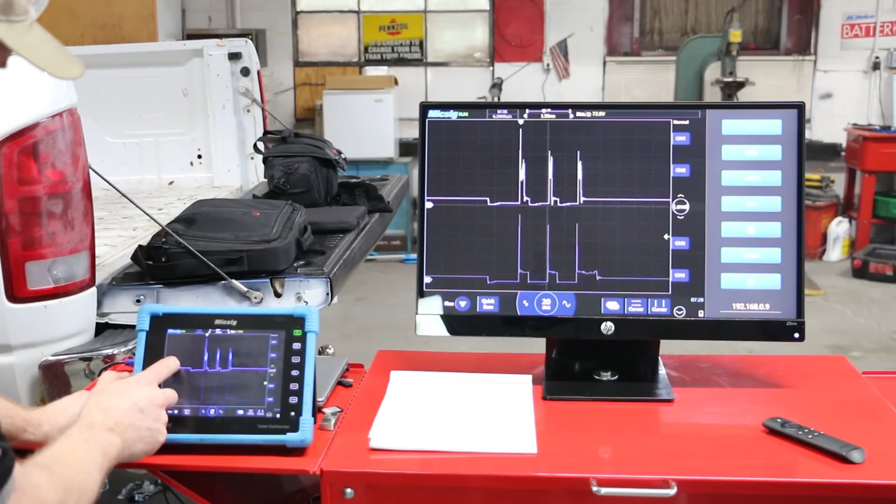I'm also going to turn off channel 1, channel 2, and we're just going to look at these two signals that were captured on the same time base, but from 2 different coils. This is the primary voltage. You see there's an evident difference between the two. What is causing that to happen? Is it a coil? Is it a plug? Is it a wire? Is it a boot? Is it a gap? That's my question.

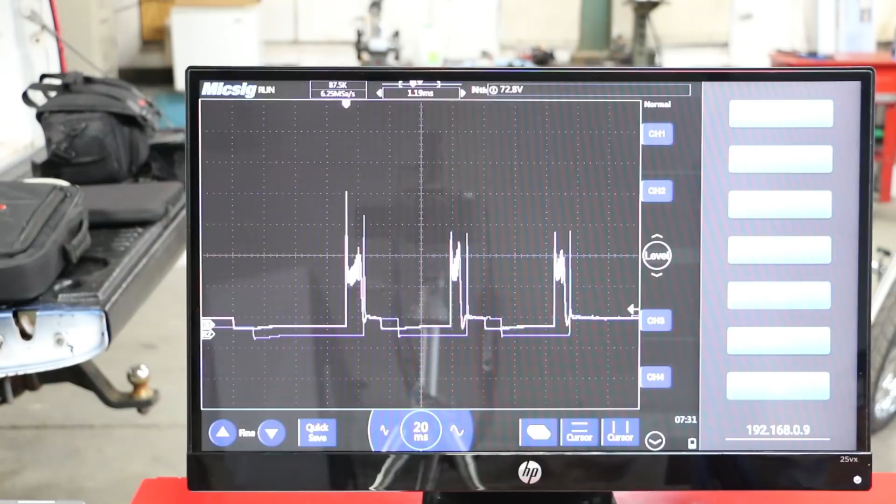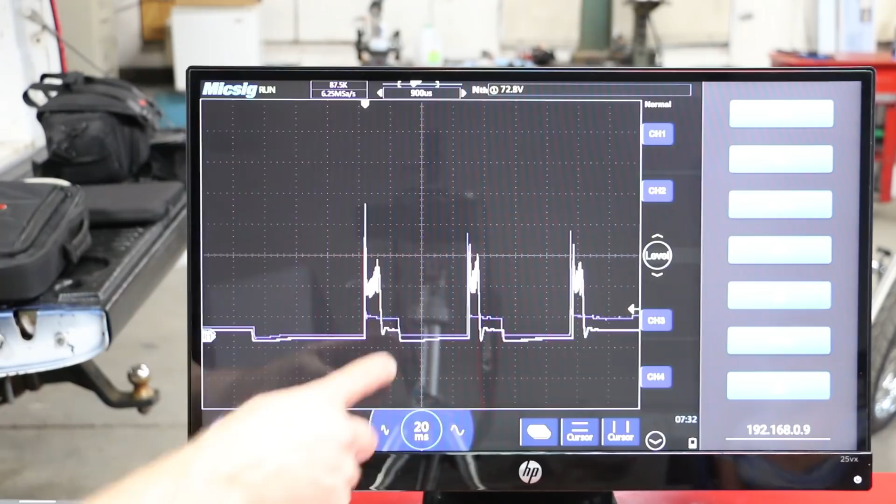Zoom this in for you. We could do the same thing. The good one. We don't even have to really measure it, as I could tell you, the dwell time. Okay, this is your dwell. A little higher voltage spike on the misfiring one. You can see an evident difference in what would be the spark line. But then the computer, of course, is cutting that one short. Same thing. And then the good spark line of the good cylinder, you can see, is much longer. There's actually a spark line there.

Okay. Let's turn off reference number 2 for now. So now we're looking at the known bad, cylinder number 4. Let's bring up some cursors. We're going to get this one as close as we can to 0. You can see that taking place up here. So Y1 is at 0. These fine adjustments get you in really close. Y2, we're going to try to bring up to the very tip of our highest reading, and that is our power kV. We are hitting a total of 173.6 volts. You can see that indicated there.

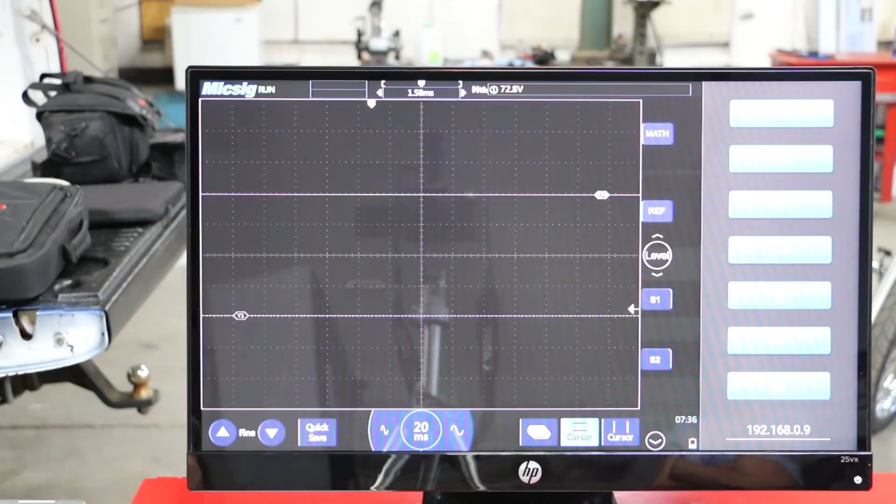Let's go back to our reference scale. We're going to turn off trace number 1, and we're going to turn on number 2. Okay. 156.8, right around there, give or take. 156.8 volts, number 6 with no miss. Go back. So now I'm going to take a reading of the time. Now we're on cylinder number 4 with the misfire. We have a total of 1.78 dwell, that's milliseconds. No measurable burn time that I could see. Pretty close to the same.

On cylinder number 6. So the last one was cylinder number 4 with the misfire. Cylinder number 6, you can see it's right on the money, so I would say 1.78. Now in this one, I can actually measure the burn time. I'd put it right around there. I have a total of 1.18 milliseconds. You see the burn line that I'm talking about now? There really isn't one to measure. And if we do consider that, that is 180 microseconds. Really nothing to speak of.

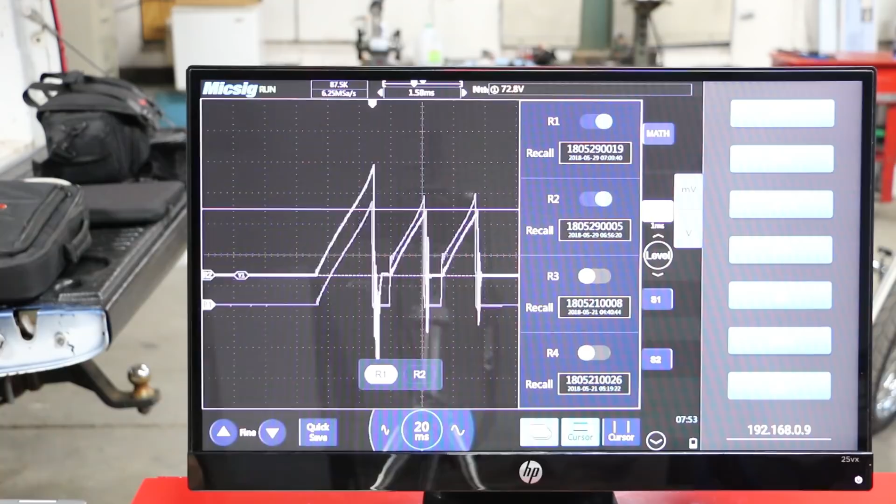R2, misfire, cylinder number 4. R1, no misfire, cylinder number 6. Look at the freaking downward spike on that one, man. Let's turn up R1. Way down here, and how does that happen? Peak to peak, we hit 13.56 amps. .24 on the first initial, and then the second two about 4.28 amps. .32, I would say, on that last one, had a little higher peak.

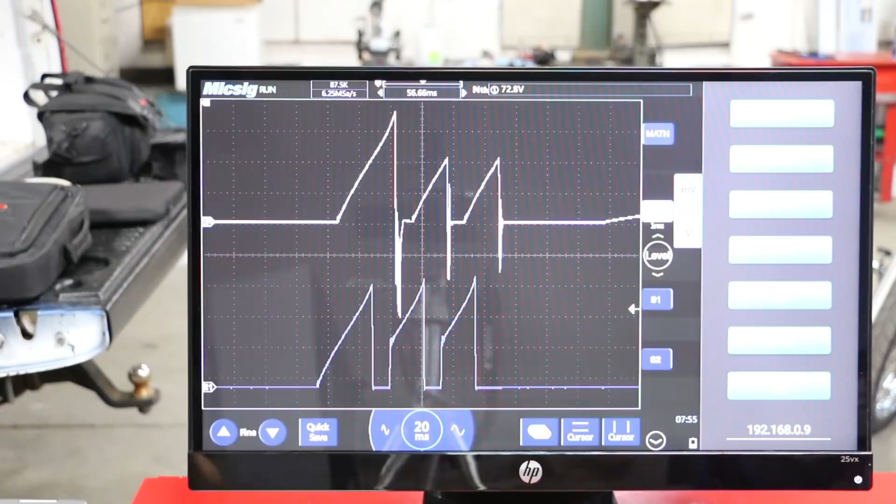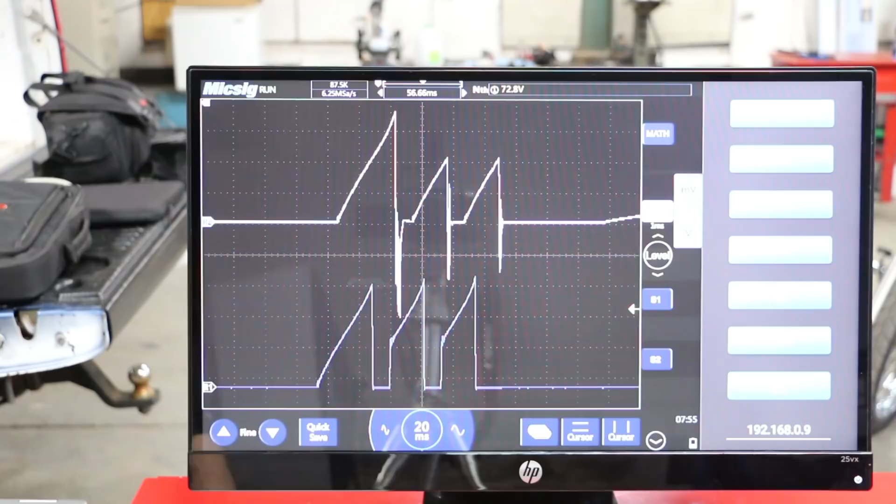Okay, so I'm going to leave you with this capture. Tell me what you think. Hopefully I didn't bore you guys too much and you find this interesting as well as I do. I hope you enjoy learning with me, and I hope to learn from you guys. So if you know any more about this waveform, what exactly is causing this, same thing with the primary voltage, what's causing that to happen,